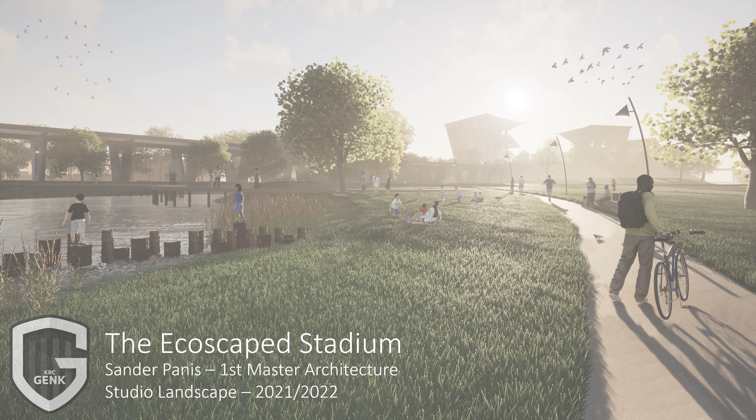For this video, I chose to start from my fascination for supporting a football club. I started going to the stadium when I was just 10 years old. It is one of my favorite things to do on the weekend, and I almost never miss a home game.

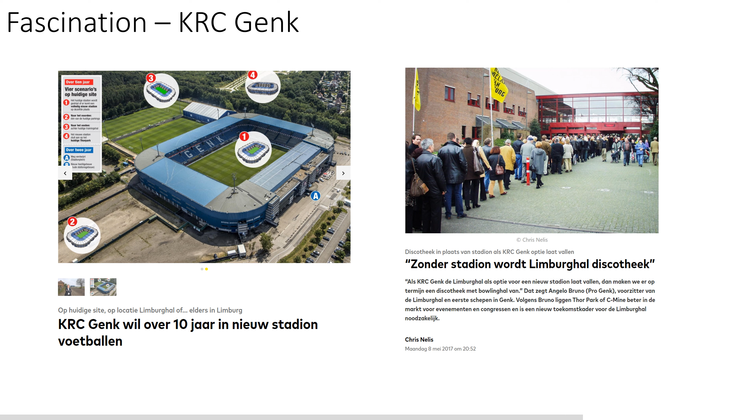I read in the newspapers that my club was looking for a new location to build a new stadium in the future. One of the locations was close to the city center of Genk. For me, it was a challenge to see if a new stadium could be beneficial for the water issues in the region, but also for the neighborhood.

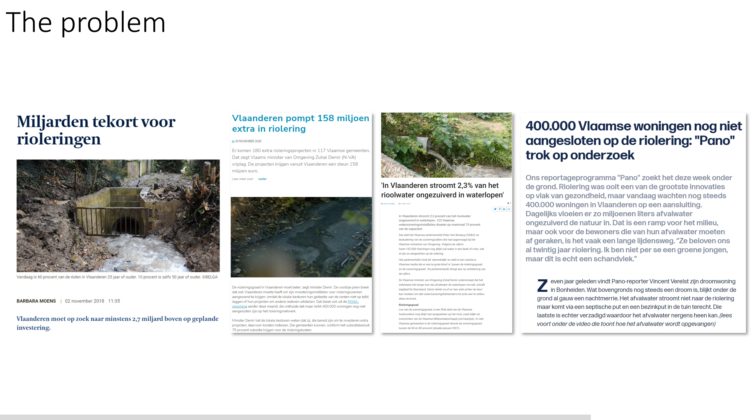One of the biggest problems is the sewage system. When there is heavy rain, the sewage water flows over into the rivers. 1 in 8 houses is not even connected to the sewage system. If we want to reach the climate goals for clean water, Belgium needs to invest 3 to 10 billion euros in the following years. Because of the fragmentation of the urban fabric in Flanders, there are long pipes between the houses and the water treatment plant. This requires a lot of maintenance.

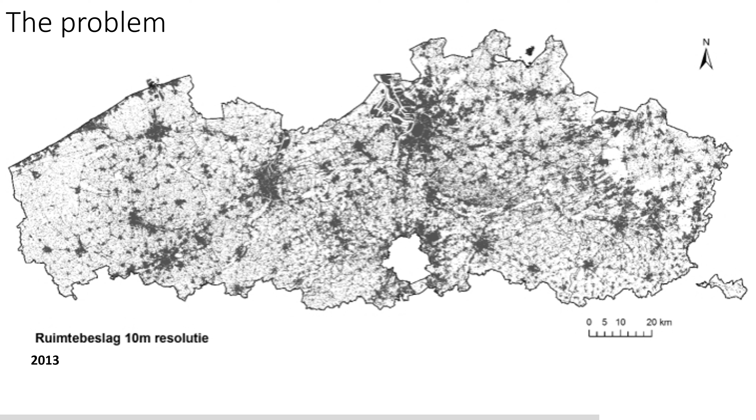The hardening routes all the rainwater to the waterways and the sewage system instead of giving it a chance to infiltrate, and this makes it harder for the water to clean. Right now, we have a linear system where we collect water and store it. When we use it, we dump it in the sewage system that guides it to the river network and it ends up in the sea. For Limburg only, it is almost 170 million liters of water every day.

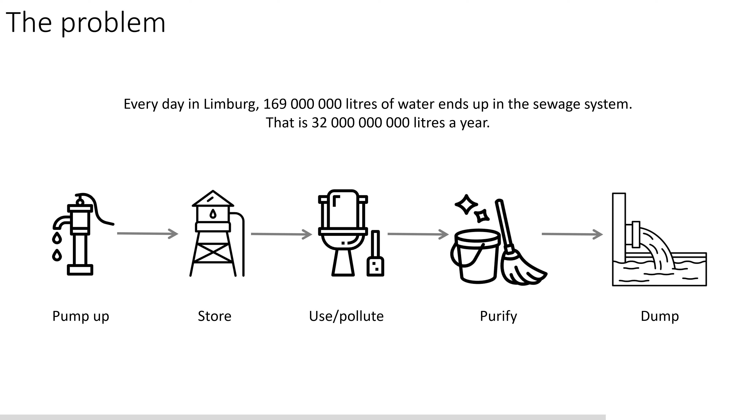I made a section of this principle to show what the current situation is. Right now, we drain the landscape. We use the water, we clean it, and then we dump it in the river and it's gone. When it rains, it flows to the sewage system, which makes it harder to clean, or it ends up directly in the river.

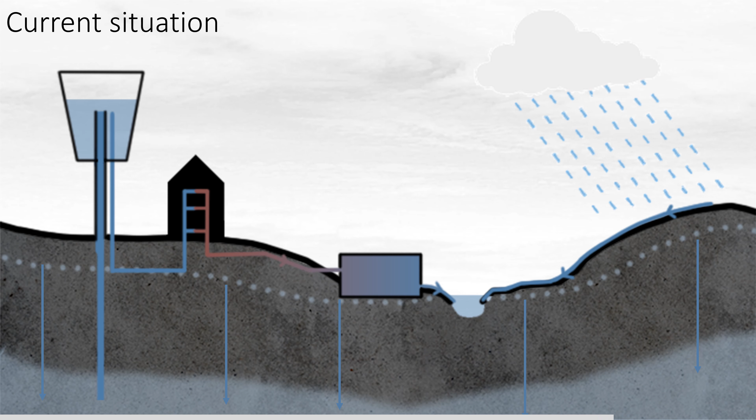Some people think that they are doing it better just because they use rainwater for some functions like the toilet. But actually, they have the same impact on the system as flushing drinking water through the toilet, because the rainwater was meant to infiltrate in the soil, and now they move it to the sewage system.

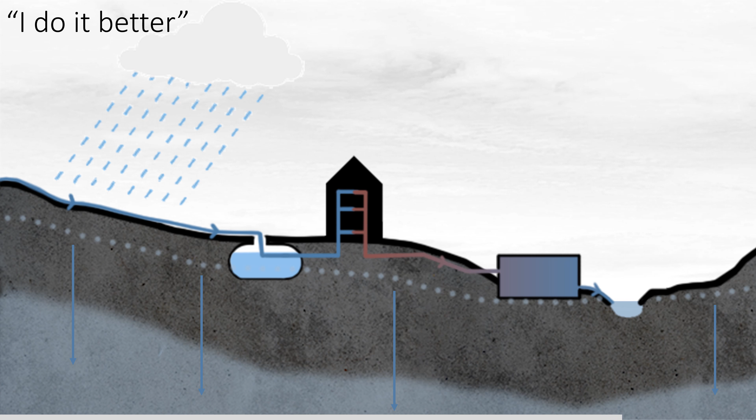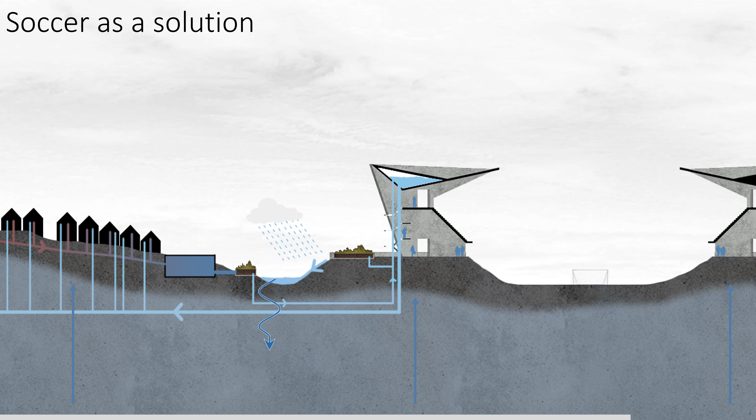What I propose is a stadium that closes the water circle. The water gets purified by gravity and then pumped up into the roof of the stadium. This roof functions as a water tower that can give the water back to the houses so they can use it instead of using rainwater. In this way, the rainwater can infiltrate in the soil.

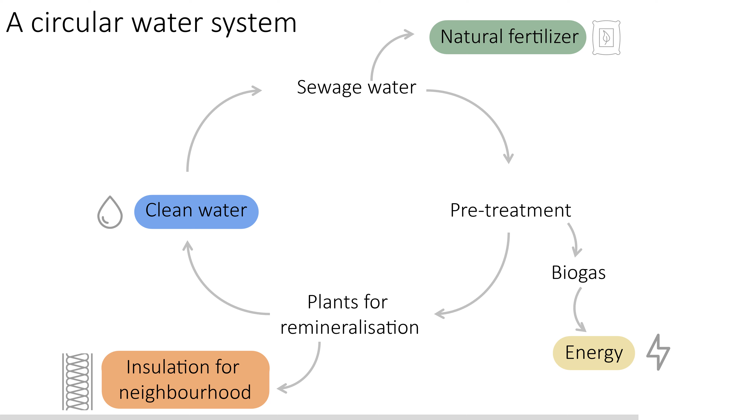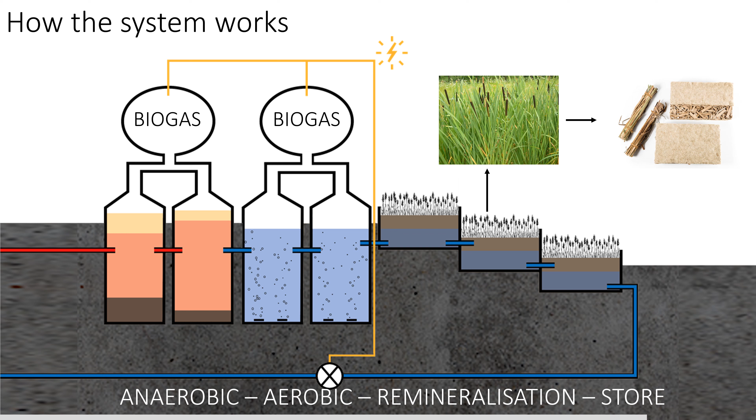The cleaning process consists of multiple phases. During the first 2 phases, biogas comes free that we can use to make energy to pump the water to the tower. The plants are the last phase, where the water gets its minerals. The plants could also be used to make insulation afterwards for the neighborhoods.

I ended up in the space between the railroads that is not used at this moment. It is located between the neighborhoods Winterslag 1, Winterslag 2 and Winterslag 4. There is a small hill between the railways, which makes it easier to fit my stadium in this location.

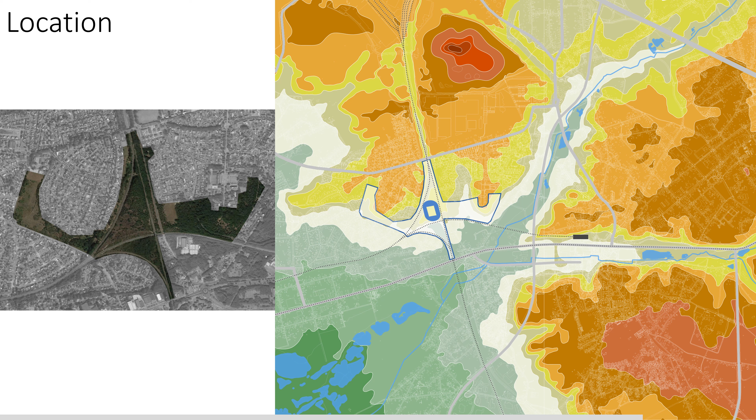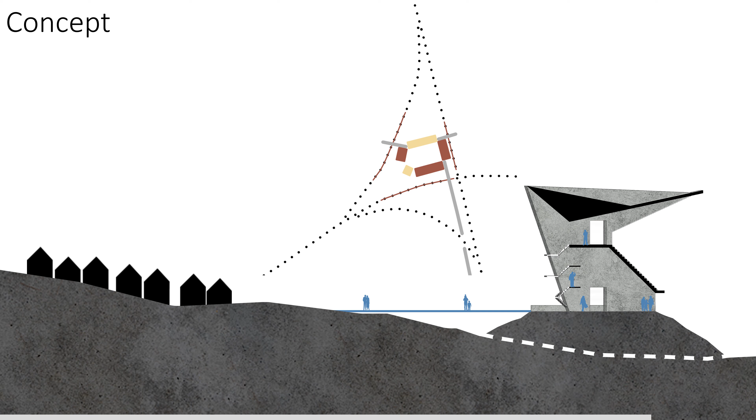The railways and the height lines determined the shape of the stadium. The stadium itself runs parallel to those 3 important lines in the landscape. The stadium will try to connect the neighborhoods instead of letting the railway be a separation and a hard border between the city and the neighborhood.

In the master plan, we can see that the stadium is connected to both infiltration parks, the neighborhood and the Hasseltweg. The last one is important for the Spartacus project, where the tram stops. And this way, the neighborhoods will have a better connection with the mobility and other parts of the city.

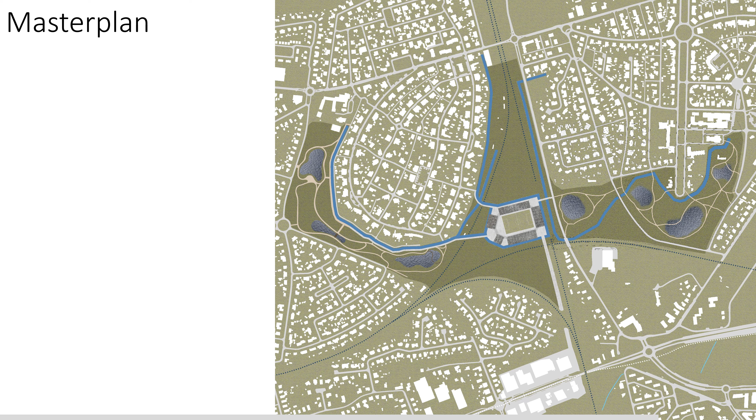By making a circular system, the rainwater can infiltrate in the park. This park will contain recreational elements for the neighborhood, like a playground, sport fields, etc. The polluted water will flow through the roots of the plants and end up next to the stadium, from where it will be pumped up into the roof.

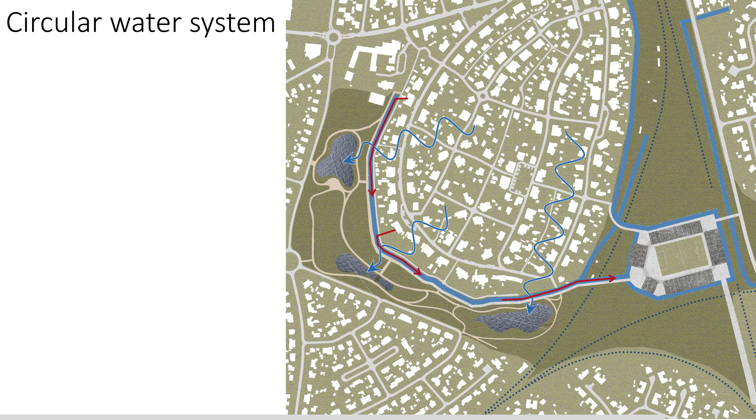In this section, we can see how the system would work. The water flows to the stadium by gravity, from where it will be transported to the roof. After that, the stadium will function as a water tower. The railways are integrated in the plan. There are bridges and tunnels so everyone can move safely.

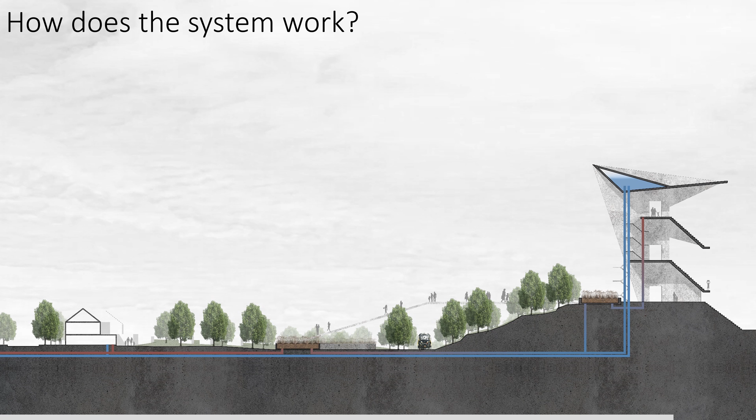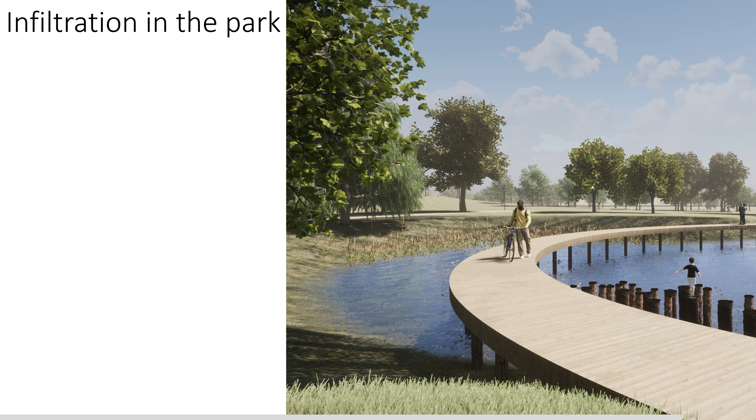This image shows the infiltration park, where a big wadi helps let the water infiltrate into the ground. The park will transform an unused space into a space that can be used by everyone in the neighborhoods. In this way, the people and planet part of sustainability will come nicely together in this project.

As I tried to make clear in the previous slides, a stadium could be used to connect instead of only divide the neighborhoods. In this way, it can have a positive impact on multiple scales and themes like water, economics, recreation, work, housing, but also biodiversity.

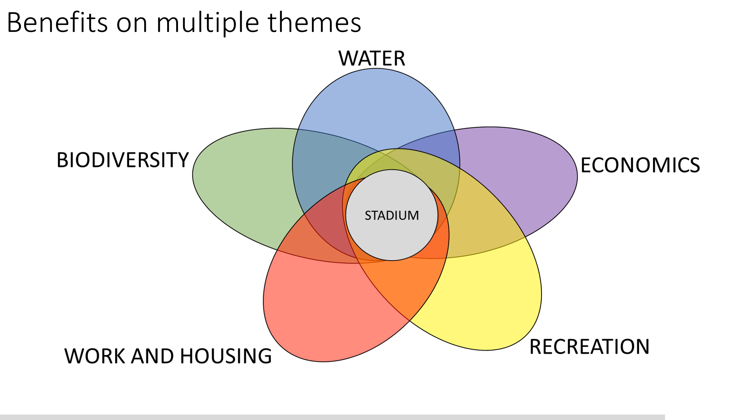Just to give an example, there will be a lot of jobs created. People can learn about the system and how they can maintain it, so that they can even try to expand it to different parts of the city or the country. They also need people for the events, food, drink shops, greenery, etc.